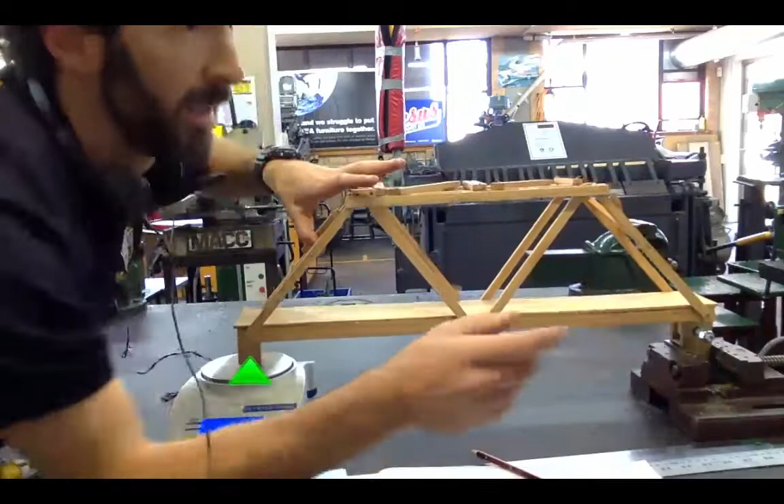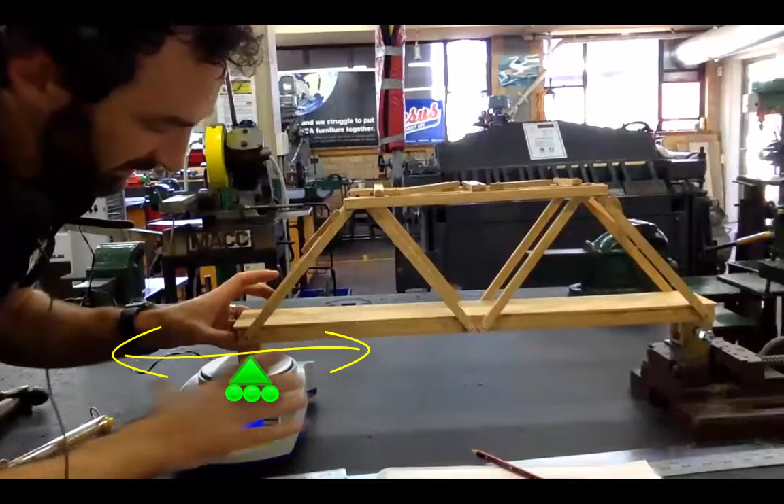This left side is my simulation of a roller. So it can slide left and right, but it can only provide vertical forces. In my case here, I've got a set of scales, and I'm going to try and measure the vertical force.

Okay, so in reality we're measuring a down force, but because every reaction has an equal and opposite, if it's 100 newtons acting down and it's not moving, it's 100 newtons acting up. Okay, so does that make sense? It's fixed on that side by this bolt, and I'm gonna do two forces on it.

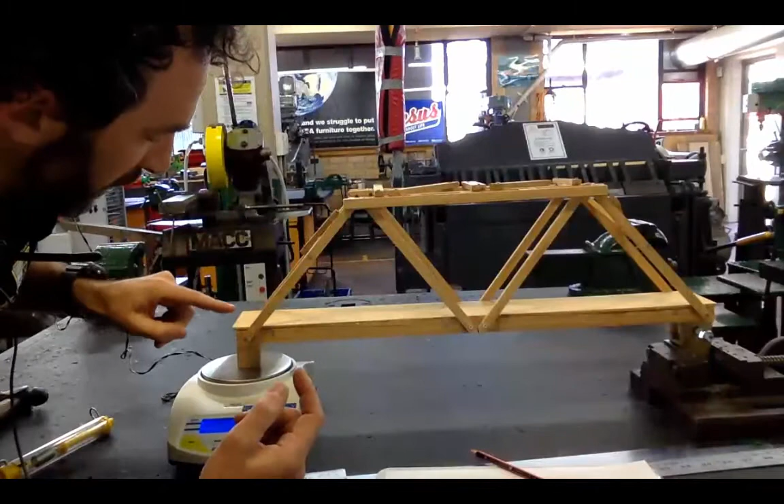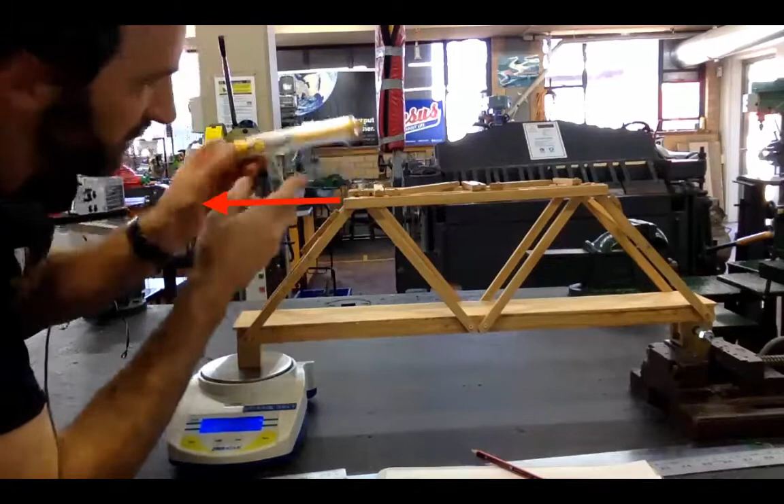One of them I'm going to push level with the deck, which will create or not create a force on the scales, so whatever you think it will do. And then I'm going to do another one where I'm going to pull on the top of the bridge and try and record with a known load. So this is just so I can measure how much I'm pulling on it. And I'm going to try and pull with a kilo of force, which is 10 newtons, and I'm going to try and measure here

the reaction force. Okay, so if I push on the bridge, or in my case, pull on it, because I can push here, or I can pull on the same spot. That's the rule of transmissibility. If I push right there, it's exactly the same as a pull force there, and it's exactly the same here. If I push up the top and I pull here, there's no difference whether there's a push or a pull.

Okay, so in our case here, if I pull on the deck, if I pull dead straight, there should be pretty much zero force on the scales, if that makes sense. Because the force is through the deck, and moment is force times distance. So if it's got zero distance, the moment is zero. Because even if I put 100 newtons and it's got no distance away, the moment is zero.

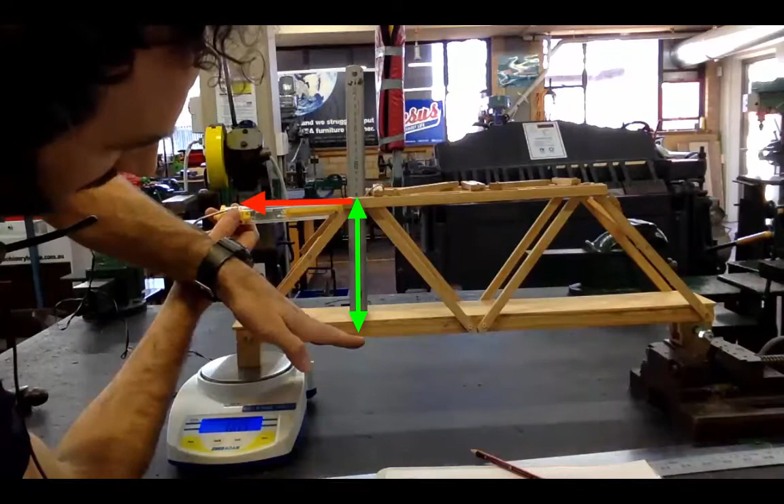So force times distance. So if the distance has a number, for instance, if I pull on the top of the bridge here, and I measure how far away it is from down on the deck here. In our case, it's about that far. So it's got force times perpendicular distance.

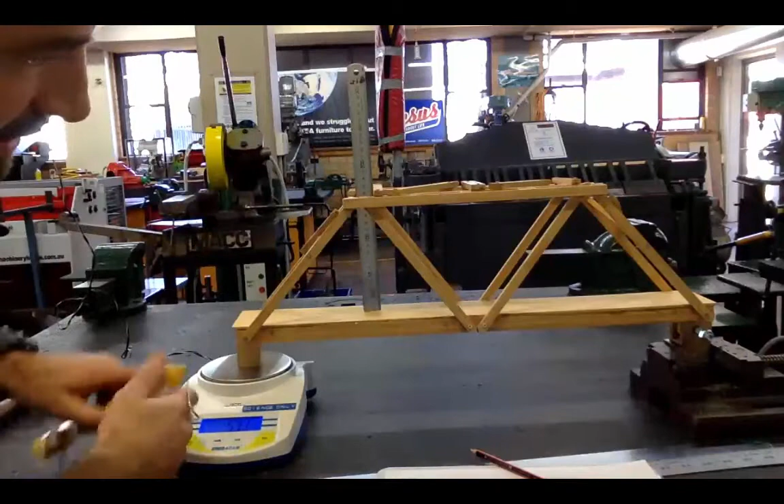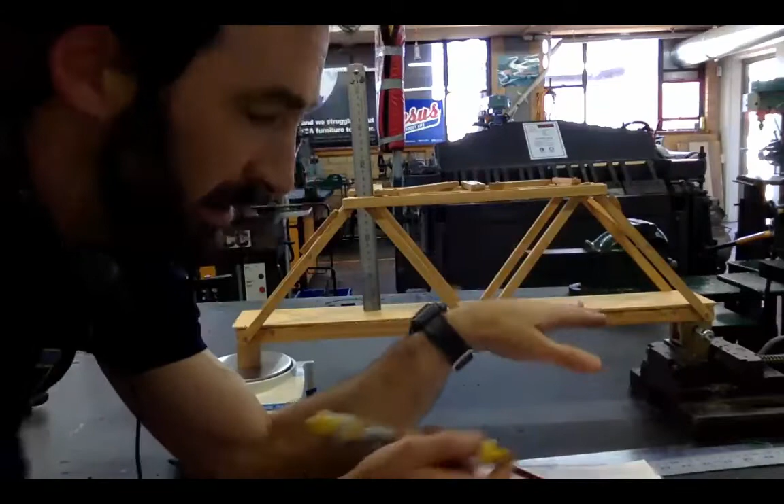Okay. The only little tricky bit here is because my pin joint is below the deck, I would take it from the distance from the pin joint to the top. In every other example we're doing, in all the examples that you see in textbooks, they take it from the deck to this point here because they put the pin joint in the drawings at that point.

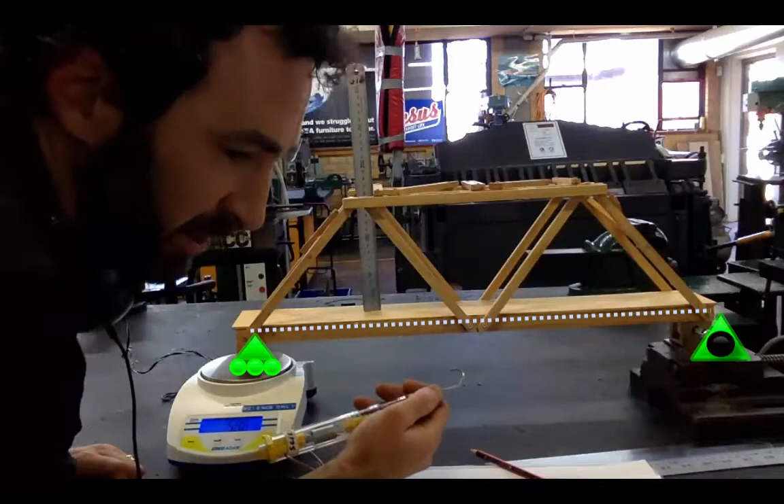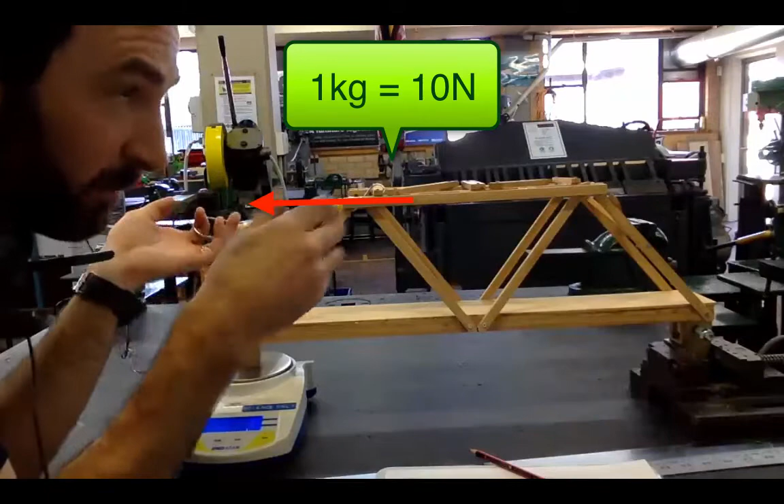Okay, so I've actually measured from the bolt to the top, and it's 210 millimeters. Does that make sense? 210 millimeters from the center of the bolt to the very top of this bridge. Okay, so I'm going to pull on the top of the bridge with a kilogram of force, and because gravity is 10 or 9.8, I'm going to say it's 10 newtons. So I'm going to pull on this.

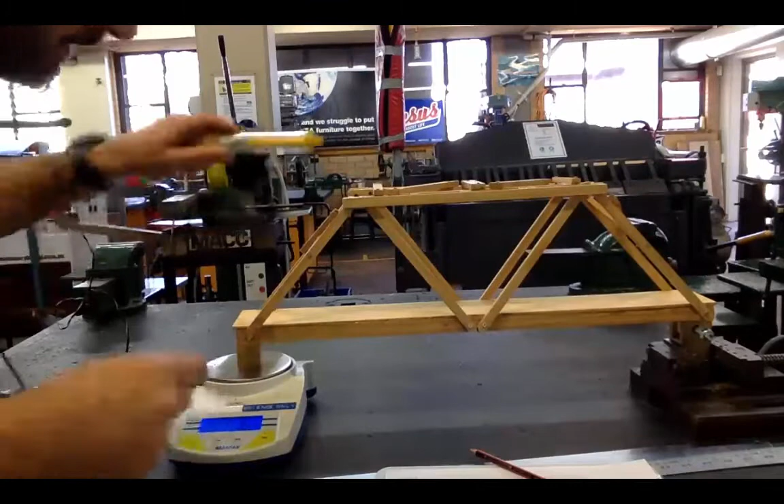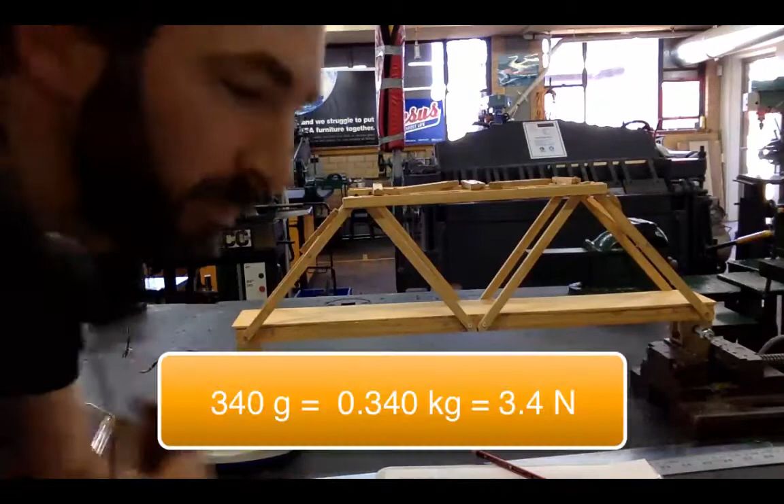I've zeroed my scales. It's pretty much zero, if you can see that. I don't know if you can see on here. Zero. I'm going to pull on the top of this bridge with 10 newtons of force. The scales should say 350. I'm seeing 330, 340, somewhere between 330 and 350 grams.

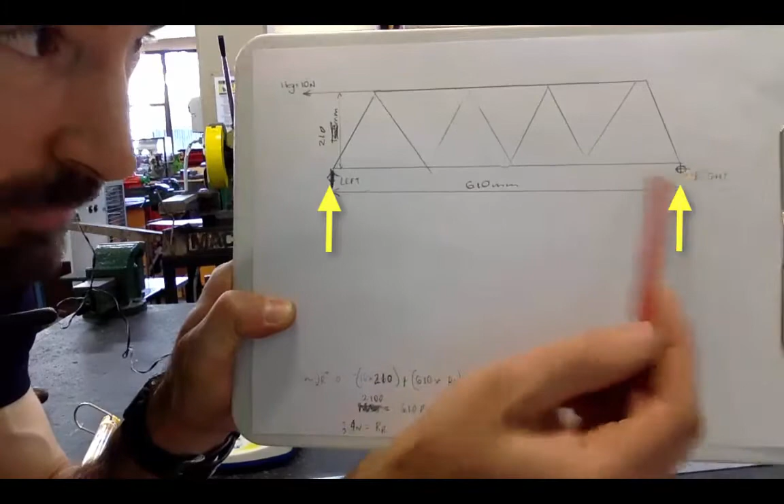Because these are scales, they're not measuring newtons. So if that's grams and I times it by 10, that's 3.4 newtons. And here's my calculation. Let me bring it up to the screen. Okay, here's my bridge. It's 610 millimeters from the left to the right, which is the same as 610 from that bolt to here. Okay, that's 610. I took it from the edge of the wood. At 610 millimeters.

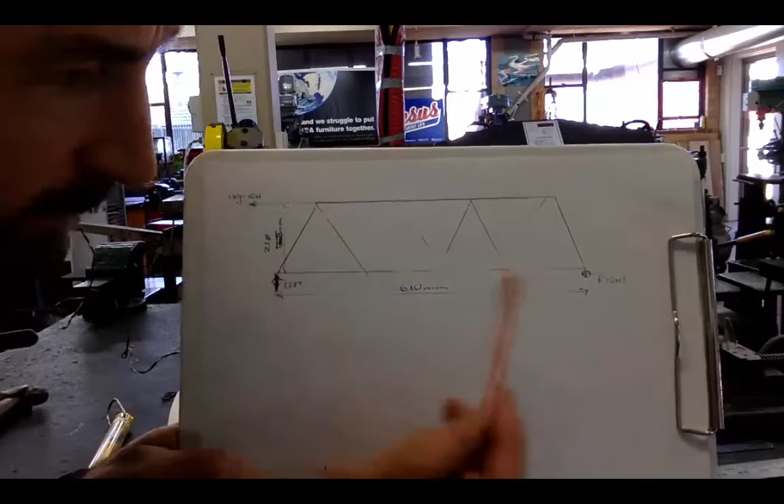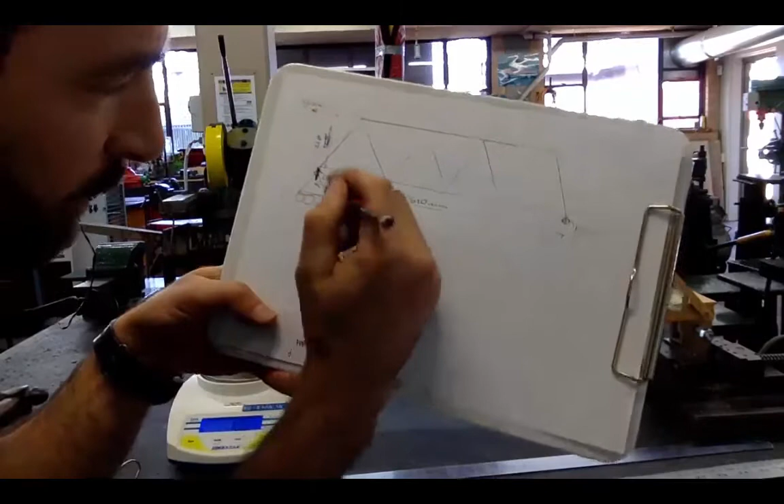Okay, here's our drawing. I've got 610 millimeters from the left to the right. The right side has a bolt. The left side is a roller joint, and my roller joint in a book would look like that. Okay, we know that, and the side's pinned. Roller joint can go left and right, but it can only react vertically. Okay, I just measured about 300, let's say 330, let's say 340.

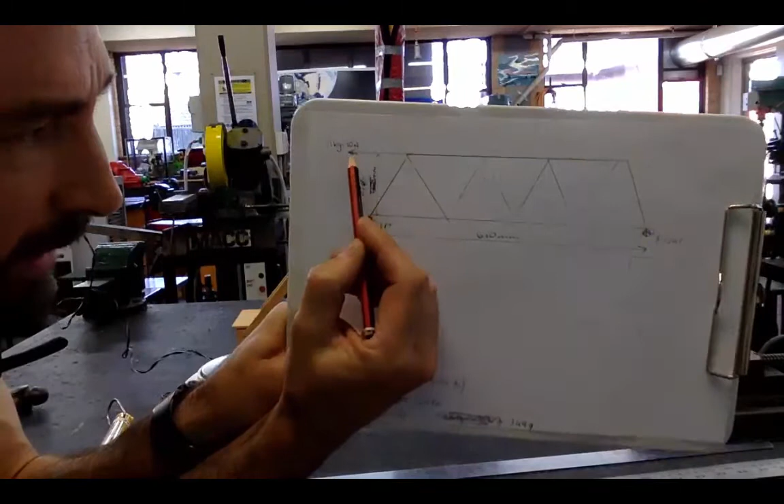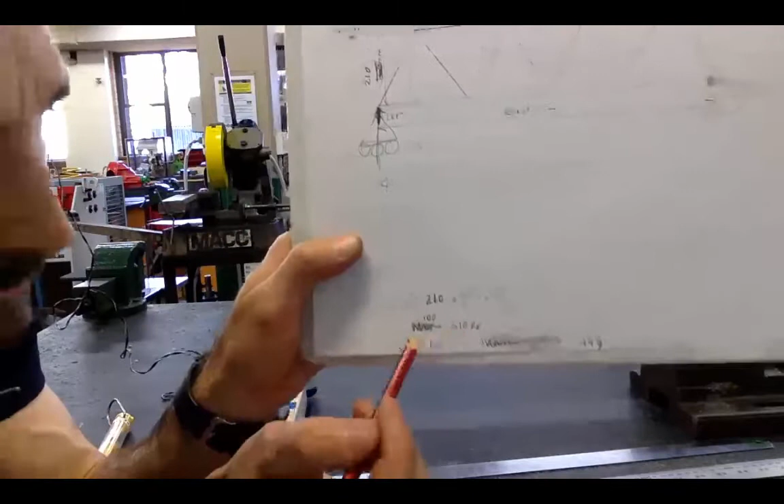Pretty generous. Okay, so I've got 10 newtons acting at the top, 10 acting to the left. That was me pulling on it. The top of the bridge is 210 millimeters from there to here. Okay, so it is force times the distance, which is 10 times 210 millimeters, which is 2,100. That's going in, say, an anti-clockwise direction, so I'll give that negative.

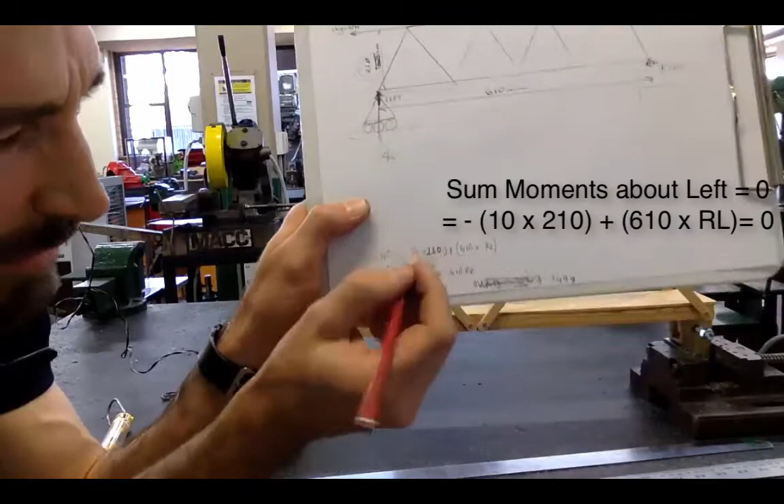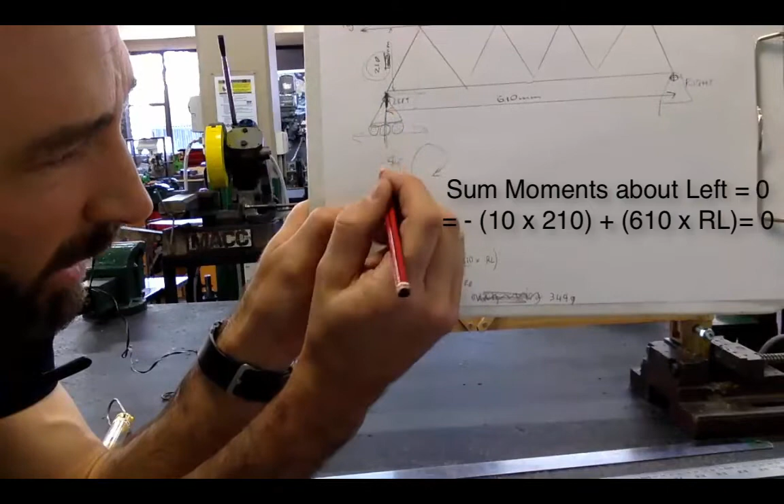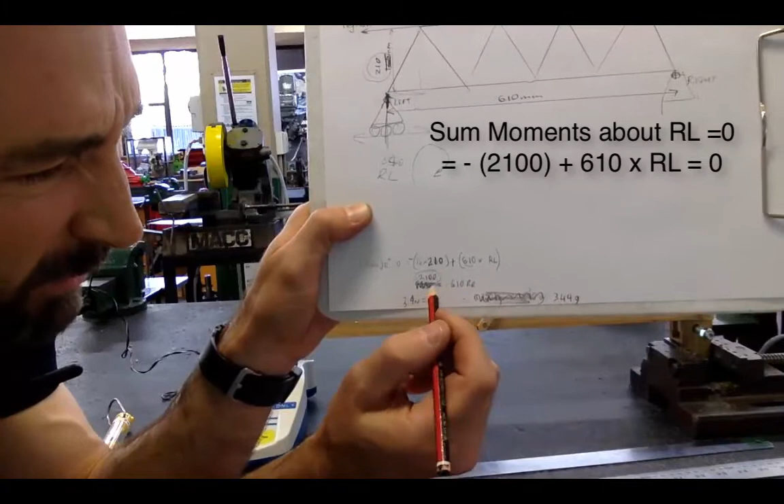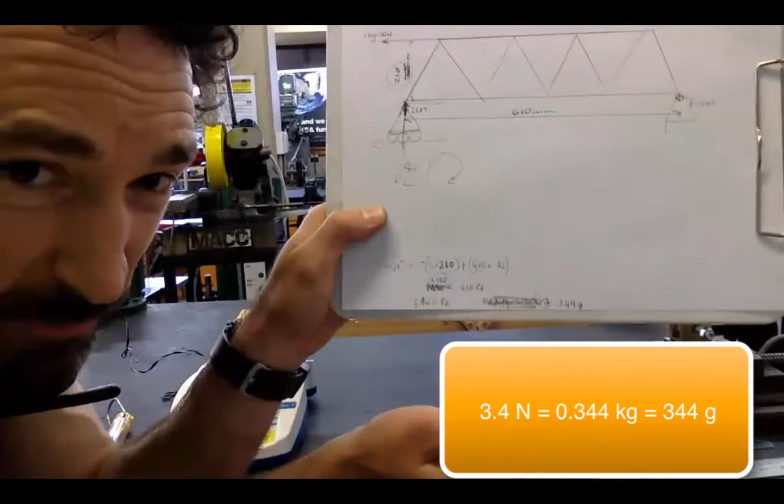And the reaction here is going in a positive or a clockwise direction around the right side of 610 millimeters, 610 times RL, and this is my RL. Okay, I'm trying to work out what it is. So if I've got 210 times 10, 2,100, and that's negative and this is positive, so this is going to equal that one. So 2,100 divided by 610 is 3.4. 3.4 newtons divided by 10 is 0.344 kilograms, which is 344 grams.

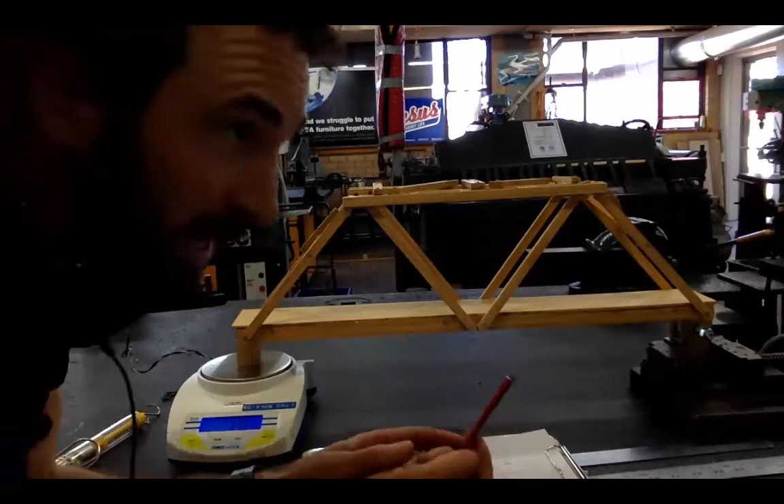So I was measuring somewhere between 330 and 350, which I think is pretty good. Last measure, that is measuring somewhere between, it fluctuates because I can't hold my finger on it exactly, a little bit less than 340 often. I account for that loss, friction, millimeters of inaccuracy in my measuring, because I want to have nice round numbers, and also possibly my zero in

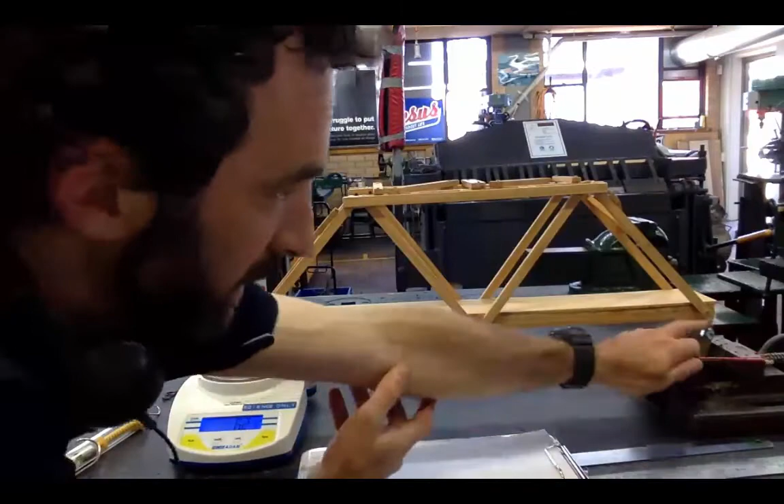here. I'm 3 grams out, there's a bit of a breeze blowing, but I'd probably include a lot of the losses in this joint as that rotates. If that's not 100% efficient, there's friction, so I'm going to lose some of my force in that bolt.